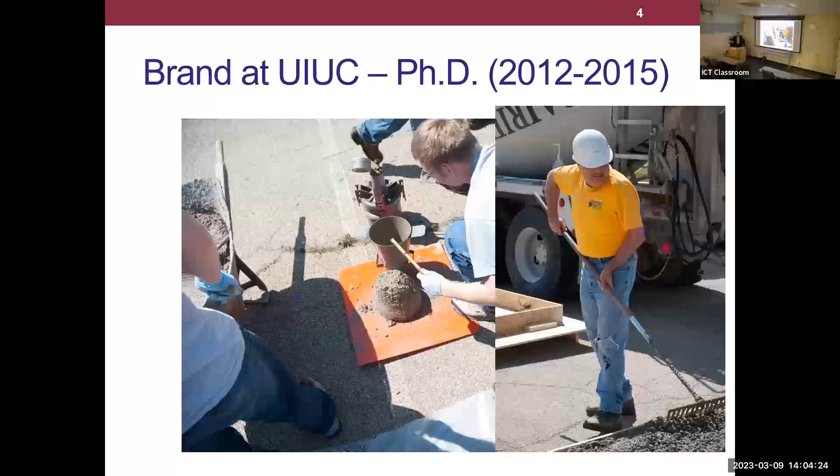We did a really big project at the beginning of my PhD doing slab testing. So we're doing slab testing in the building next door, right? I'm really strong. I was able to lift those 1,000-pound slabs of concrete, right, to test them. But anyways, it was a huge project. Dr. Roesler even helped us cast the slabs, right? We had a big project. I think we had 16 slabs or something to cast in one day, 4 concrete trucks. It was a lot of fun.

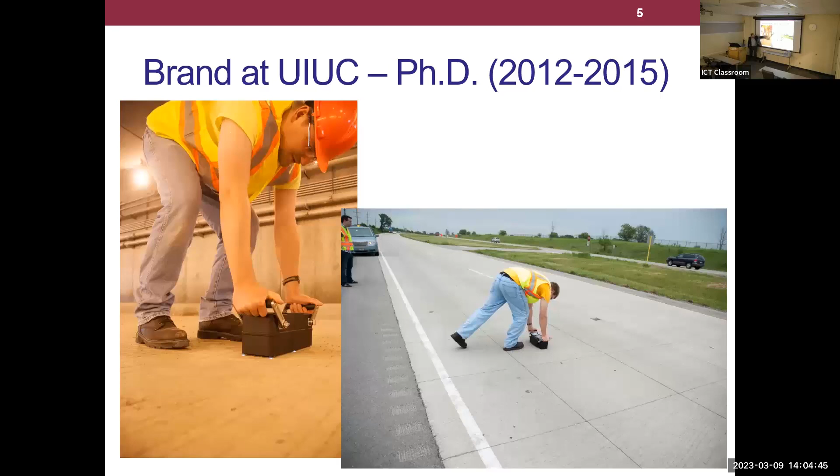It was also fun going out in the fields, right? Running out in the middle of traffic with some NDT equipment. You can kind of see some trucks in the background there barreling down the road towards me. Fun times, right? And probably some of the best memories, right? We're just with a great lab group. So I'm sure there's still some people here that only recently graduated, right? This photo's from 2015, and just to tell you how long it took some people to graduate there. Right? And then of course, probably my favorite memory is I was Santa Claus at the Christmas parties, right? So who's Santa Claus now? Do we still have a Santa Claus? Yeah.

Oh, okay. So at least someone took up the mantle of Santa Claus. So anyways, it's still really great. Illinois has such a large network. Dr. Race's group, you know, we see each other a lot at conferences. He was at a conference in Texas where he was sitting on the Longhorn here, right? So my group now at VT is not that large, but I can aspire that one day I'll be at a conference sitting on a Longhorn, and my group will be around me. That's what I hope to aspire to.

But anyways, let's get into the talk. So again, talking about the interaction between cement and asphalt. Part of this is going to be an extension from my PhD work. So I'm going to introduce some of the stuff I did during my PhD, and then all the new stuff I'm doing at VT on a related topic. So kind of an alternate title here is, why can't we be friends? We do have bonding issues between overlays and things.

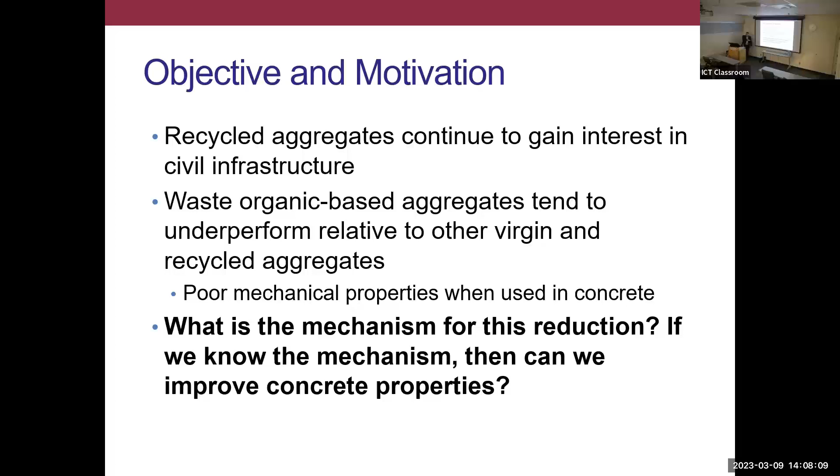So anyways, we know there's some sort of bonding issue between RAP and cement paste. That's what I found in my PhD, and that's what I'll be showing a little bit here. The question is why? Because if we can answer why and establish a mechanism as to why that happens, then we can devise a method to interrupt that mechanism, and then potentially improve bonding or somehow improve performance otherwise. Okay.

So this is work from years ago that I did. This is increasing RAP content. We did fractionated RAP, so we also called it FRAP, so you'll see FRAP and RAP on here as well. Basically, just replacing up to 50% of the coarse aggregate in a concrete with RAP. You can see the significant reductions. We're dropping almost 50% on tensile strength. It's a fairly significant drop.

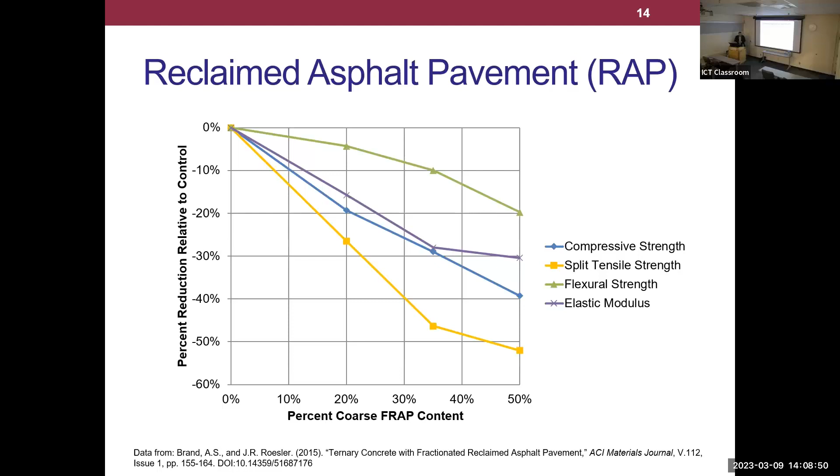So then traditionally we would have to over-design our pavement to accommodate for that. But that was a different study, that's a different story. You actually don't have to, but I'm not going to talk about that today.

So first off, the first thought people had was, okay, your modulus is decreasing when you use RAP. Well, of course it is. Asphalt binder itself has a much lower modulus than concrete. No surprise there. But we actually proved that wasn't the issue. We went and froze the concrete, to the point at which asphalt becomes stiff enough to be close to concrete. And we basically found that the modulus didn't change.

Okay. Also, when you're using 50% RAP as a replacement of your coarse aggregate in the concrete, only 0.4% of the total volume of the concrete is asphalt. So is 0.4% asphalt really going to be the only reason why you're dropping modulus by 40%? That doesn't seem logical, right?

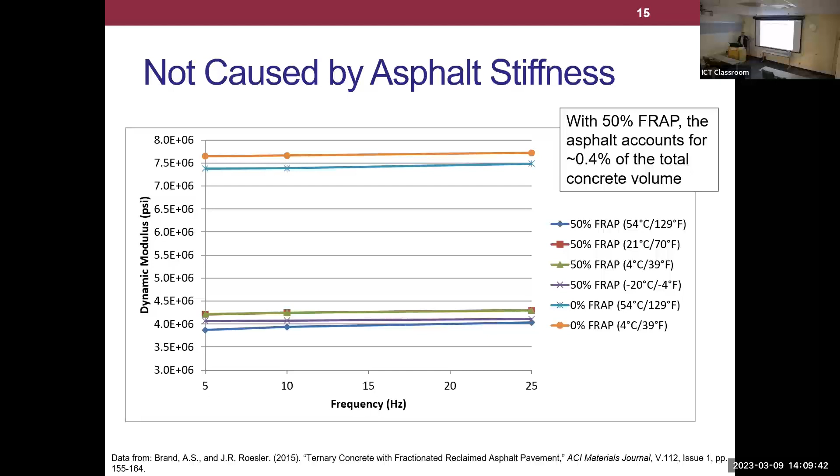So what we did then is we looked at something known as the interfacial transition zone. So this is the ITZ that forms in concrete due to something called the wall effect. In a concrete, the aggregate basically looks like a wall relative to your cement grains. Cement itself also has a gradation, a very, very fine gradation, with a mean particle size of about 15 microns.

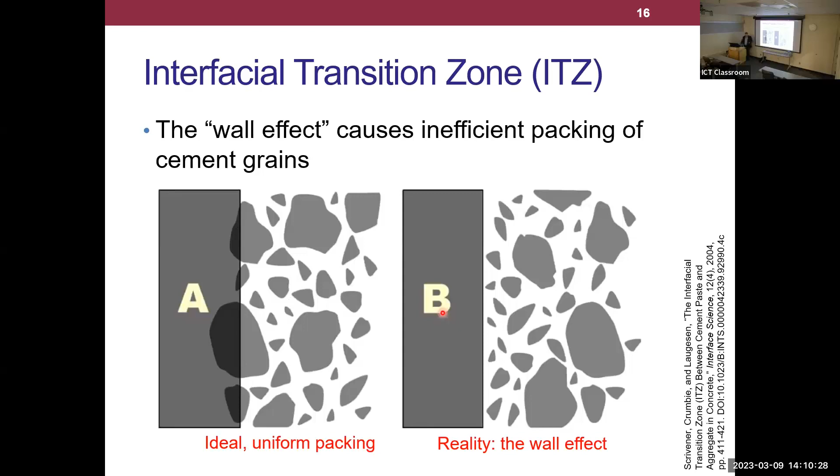So a 15 micron cement particle relative to a 25 millimeter coarse aggregate, that coarse aggregate is a gigantic wall. So it basically means there's going to be inefficient packing immediately against that aggregate wall. Because of this inefficient packing, we form this thing known as the ITZ. So how do we study this ITZ? And we're going to talk about what the properties of the ITZ are in just a minute.

Okay. Well, why didn't that?

There it goes. So in order to study the ITZ, we have to look at a fairly small scale. The ITZ itself is only going to be about 20 microns to maybe 100 microns surrounding the aggregate. So that's pretty small, so we use an electron microscope. An electron microscope is a similar idea to a typical optical microscope, except we're using electrons instead of light to image your surface. And instead of your eyes looking at the image, you have an electron detector that's reading the image.

Sample preparation is really difficult. You have to take your concrete, dry it out, backfill all the pores with epoxy to stabilize the microstructure, then polish it really flat, and then you can put it in the electron microscope. That process alone took me 6 months of my PhD. But once it worked, we were able to get a lot of data. So anyways, that's what we did.

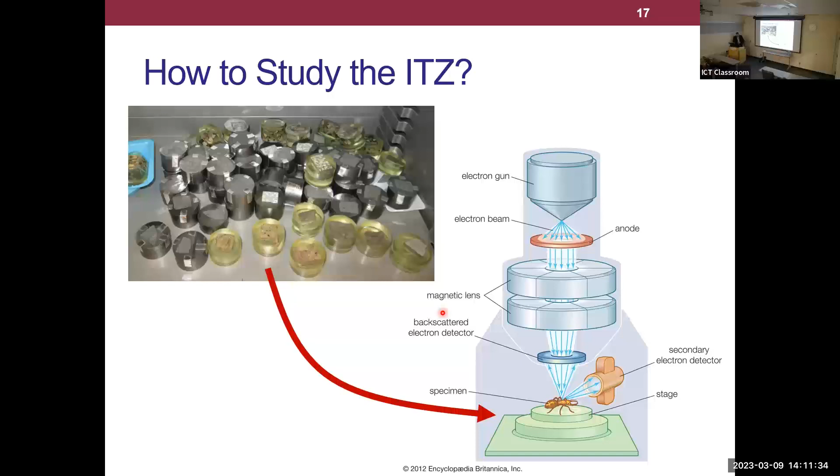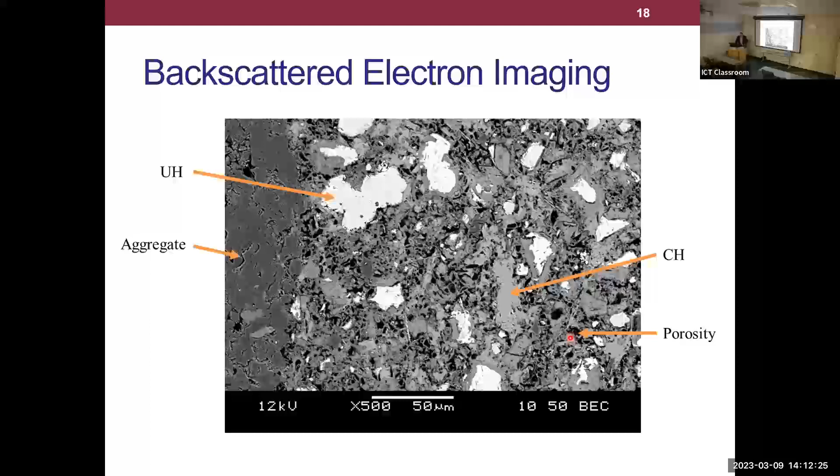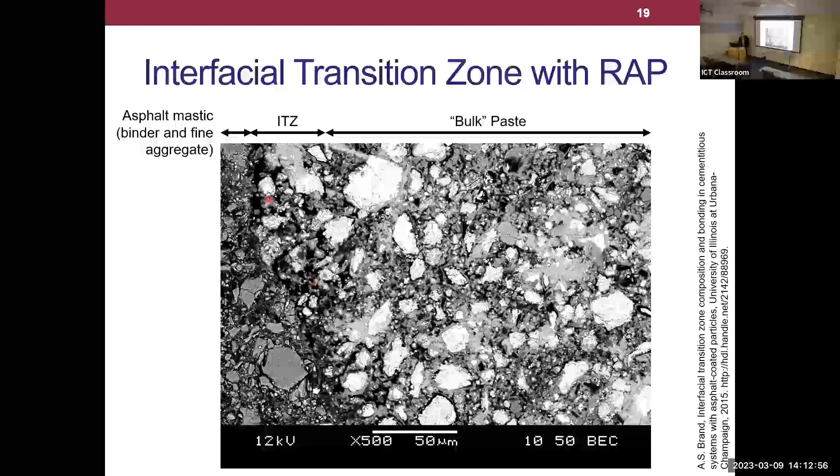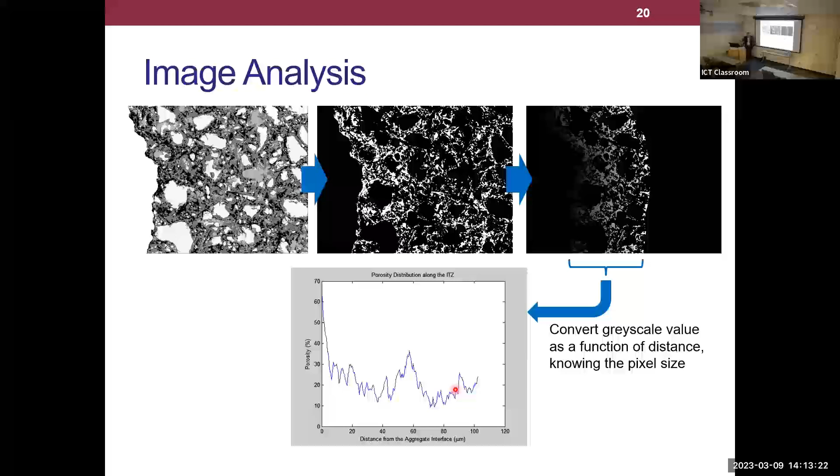So what we have to do here is just use image analysis. I won't go through all the image analysis, but you basically threshold out what's the unhydrated cement, what's the calcium hydroxide, what's the porosity, convert it to a binary image, do some more image processing, and you can then basically get a gradient of these properties as a function of distance from the aggregate surface. And when we do this over many images, we can come up with an average representation of what the ITZ looks like.

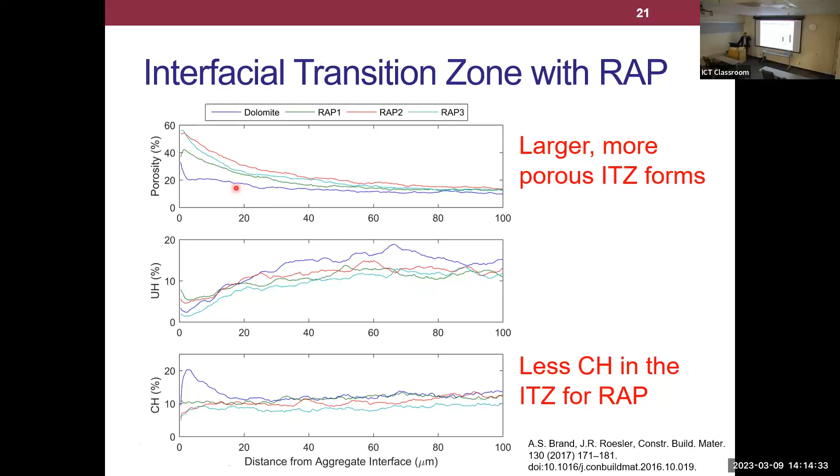And then there's some other uses. There was some interesting stuff with calcium hydroxide, unhydrated cement. Not a whole lot of changes. But really it's this porosity that's very different. Now typically, when we're designing Portland cement concrete, we add a whole bunch of stuff to it. One of the things we typically use to make high performance concrete is to add something known as silica fume. That's a supplementary cementitious material, and we tend to get a much higher strength concrete, much more durable

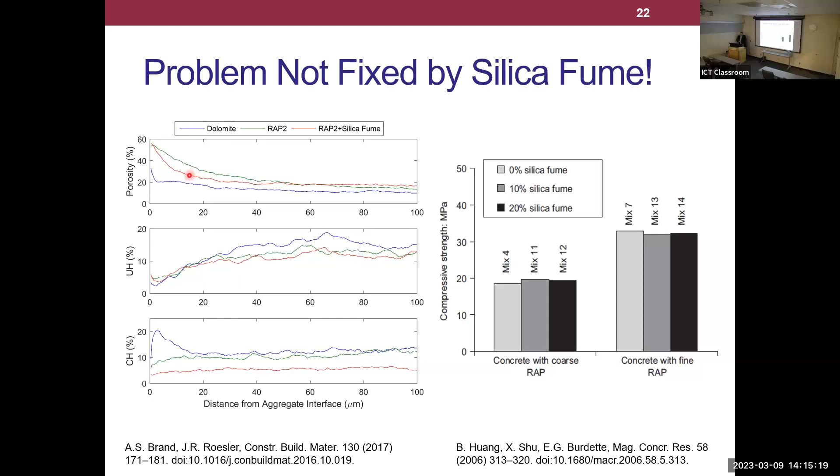concrete. But what we found and what other studies have found is that adding silica fume to concrete with RAP did not make an improvement. So you were basically wasting money by using silica fume here. Silica fume is about 10 times more expensive than cement, so you're literally throwing money away. We still see there's a little bit of an improvement in porosity here, but it's still a fairly large porous ITZ. So silica fume doesn't fix our problem.

So then we came to the question: why do we have a larger, more porous ITZ? Why is it forming? It doesn't seem logical that it would form. There has to be some sort of mechanism that's causing it to form. So everything up until now was stuff I did during my PhD. Everything from here on is some of our new stuff that we'll be publishing soon.

What we know from the existing literature is that there are compounds in the asphalt that can leach out of the asphalt. It does depend on what your solution is. Are we talking about rainwater? Are we talking about an acidic, some sort of industrial water? We do know that there are compounds that will leach. Probably everyone here already knows asphalt is a very complex chemistry. There's no one molecule of asphalt. There's a very large range of molecular weights and chemistries and functional groups and heteroatoms and all that sort of stuff. But anyways, we do know that there can be leachate from asphalt.

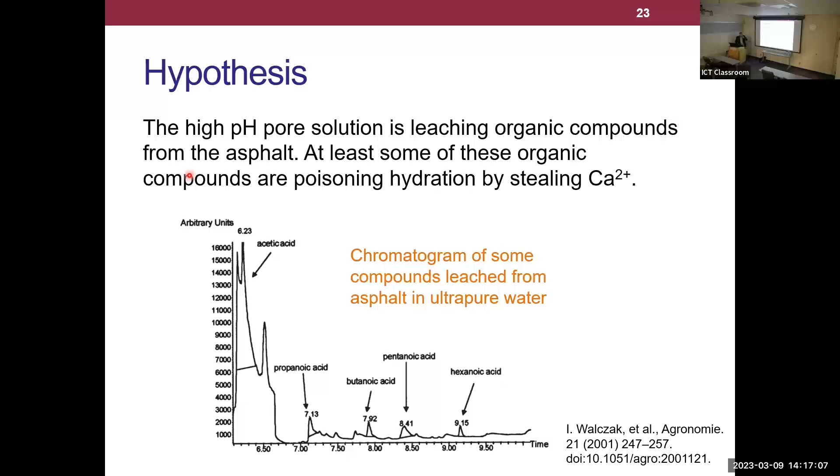So our hypothesis then was, when cement hydrates, it produces a very high pH pore solution. In a saturated concrete, those pores are not filled with air, they're filled with pore solution. That's a high pH pore solution. So our hypothesis was that high pH pore solution is leaching compounds from the RAP, from the asphalt on the RAP, and that is somehow poisoning hydration. It's somehow preventing hydration from happening. So then we set off to see if that hypothesis made sense.

The first thing we did was just a simple proof of concept. We took some RAP and we soaked some of it in an NaOH solution, sodium hydroxide. Again, pore solution is a high pH. It has sodium, it has potassium, it has hydroxyl ions and some other stuff. For simplicity, we just used NaOH as an analog, much easier to work with. So we did a pH 12 NaOH solution. We soaked the RAP in that, then we also soaked it in water.

Every few days, we would take a sample out and send it to a TOC analyzer, total organic carbon. In this technique, you basically inject your aqueous solution, it goes through some sort of flame ionizer, and it tells you how much organic carbon is there. So it doesn't detect, for instance, CO2 dissolved in the water. That's not organic carbon. The organic carbon would be things in organic molecules. Asphalt is made out of organic molecules.

So what we found is that in the sodium hydroxide solution, we are definitely leaching a lot more organic compounds than we are in water. So that's our first suggestion that maybe this hypothesis starts to make sense.

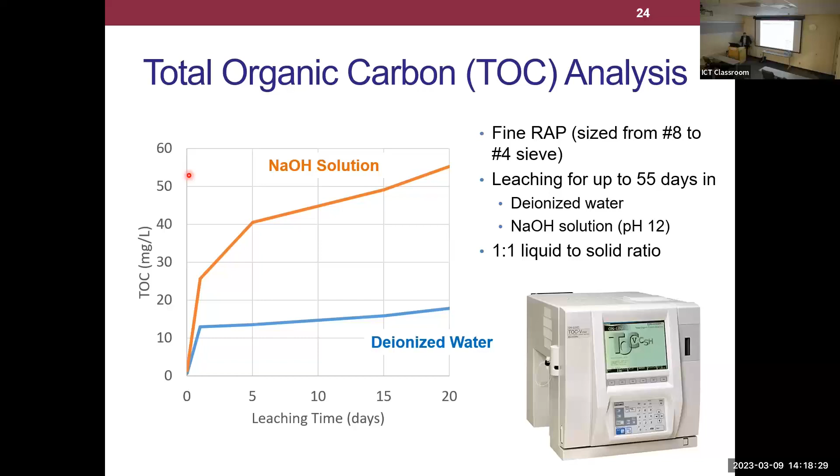So then we did something known as HPLC. Okay, so now we're getting into a lot more chemistry here. So this is high performance liquid chromatography. So here you take your sample and you drop it through a column that's going to be filled with something, right? There's various types of columns. And you basically measure how long it takes for the various compounds in your solution to travel through that column.

Okay, so depending on the polarity of the molecule, the size of the molecule, its adsorption characteristics and things, you're basically going to see different retention times. So how long it takes for that compound to travel through the column. You're going to see different retention times for different compounds.

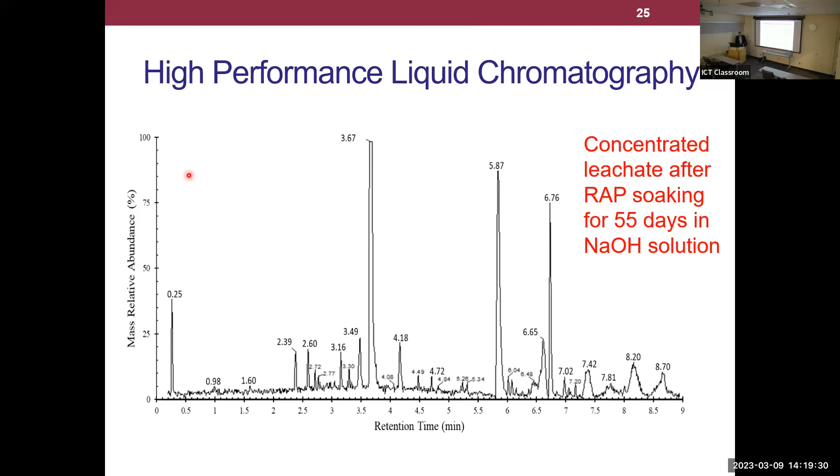So what we're seeing here is a lot of peaks, which tells us there's a lot of different compounds. And that's maybe no surprise, right? Asphalt, again, is made out of a whole lot of different compounds, right? There's no one molecule we can define. So this kind of confuses everything because that's a lot of stuff here, all right?

So then what we did is we basically took solution at specific retention times, right? So you have this liquid traveling through the column, okay? And then you grab that solution coming out of the column at specific times.

Maybe I should use this so the audience online can see, right?

You grab it at specific times, and then you can basically do chemical analysis on that. So it's a way for you to sort of segment out these different peaks, okay? So the first one is we took this main peak here, and we sent it through something known as a mass spectrometer. So in a mass spectrometer, you send your aqueous solution, it goes through a flame ionizer, or in this case, it was an electrospray ionizer or something. It basically ionizes your

molecules, right? And then the mass spectrometer sends it along a magnet, right? And however long it takes to travel along that magnet tells you what the mass to charge ratio is. That's kind of a weird way to think about things. Okay, so it's the molecular mass of that compound divided by the charge, right? So it could be a 0 charge, 1 charge, 2 charge, 3 charge, whatever it is. Okay, so it kind of relates to molecular weight of the compound, but it's not necessarily the molecular weight of the compound, because that flame ionizing technique can basically fragment your compounds if it's a big molecule.

Anyway, so it's probably more chemistry than people want to hear. So if this is where you want to put your hands over your ears, you can.

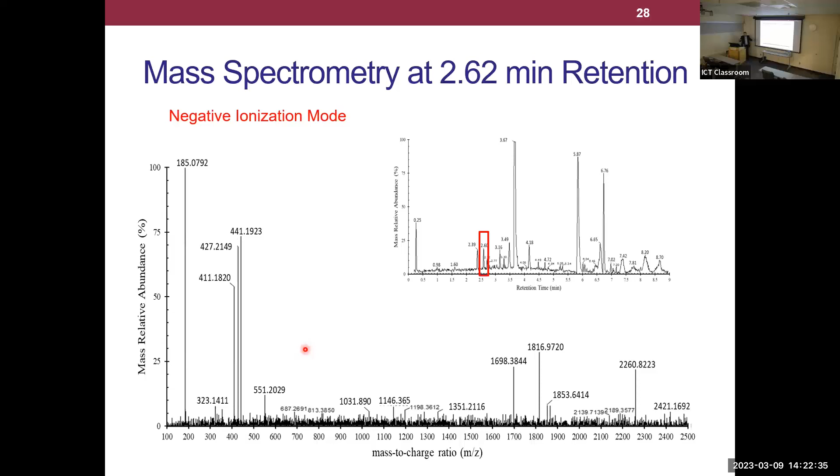So again, all this is really telling us, right, is that whatever organic compounds are in this leachate, it's a whole bunch of different compounds, right? There's no one compound that leached out. Again, maybe not a surprise. Asphalt itself is not one compound, right? There's a lot of stuff there.

So some other stuff we did then is we used Fourier transform infrared spectroscopy. Again, maybe a little more chemistry than you wanted to know. In FTIR, peaks correspond to specific functional groups. Okay, so basically when we compare, so this is kind of our blank scan, right, without any leachate, right?

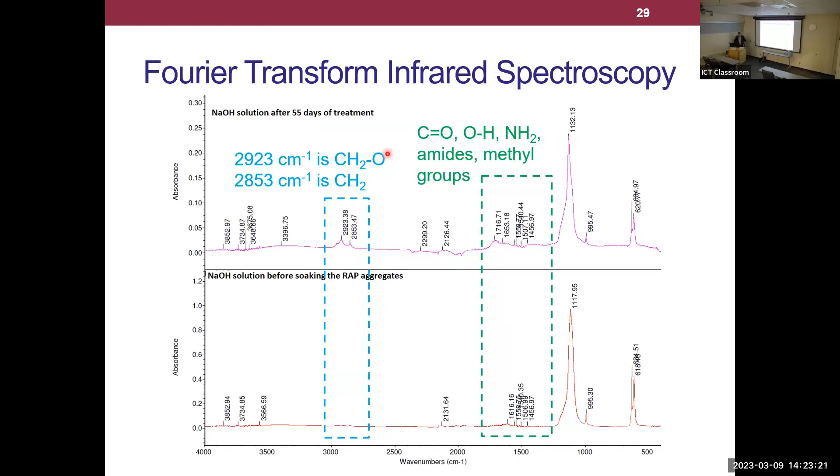And here's the leachate from RAP. And for the most part, you see things are pretty similar, but you see a lot more peaks here, right? And basically these all correspond to sort of organic compounds, right? So again, that's maybe not a surprise. But again, there's just no one compound in this leachate, right, that we can point to. And this is, again, what that sort of suggests.

Okay, so now we know that there is something in the leachate, right? We do have organic compounds in the leachate. Are they actually affecting cement hydration? That is our next question. Okay, so here we use something known as isothermal calorimetry. We use this a lot in cement and concrete science. So as cement hydrates, it gives off heat. In a calorimeter, we measure how much heat is given off over time, right? And that gives us kind of an idea about the kinetics, okay?

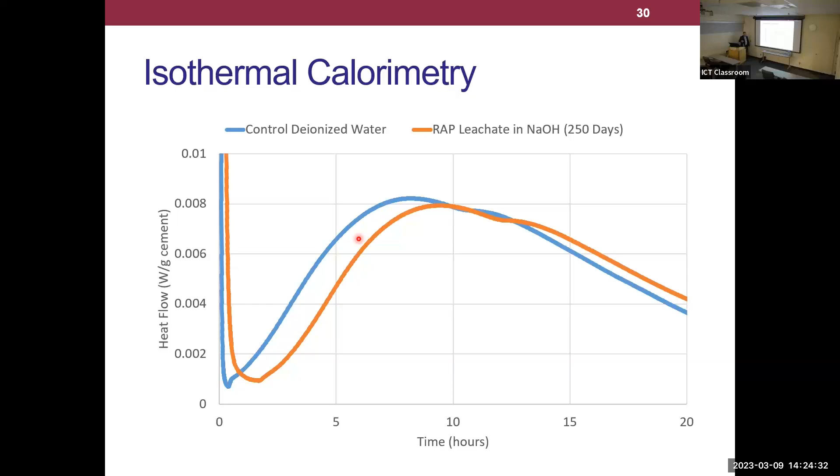So what we're seeing here is we're looking at a control sample where we just mixed cement powder with water, right? And then the orange line is we mixed cement powder with that NaOH solution that had that organic leachate, right? And what we're seeing here is a shift right. So this main peak, this is our main hydration peak of cement. We're seeing this peak shift to the right, which basically means that we did delay the rate at which cement hydrated. Okay, so there was some retardation, there was some change to how the cement was hydrated, right? We did delay it slightly. Okay, so now we kind of have an idea that, yeah, maybe this hypothesis does make sense.

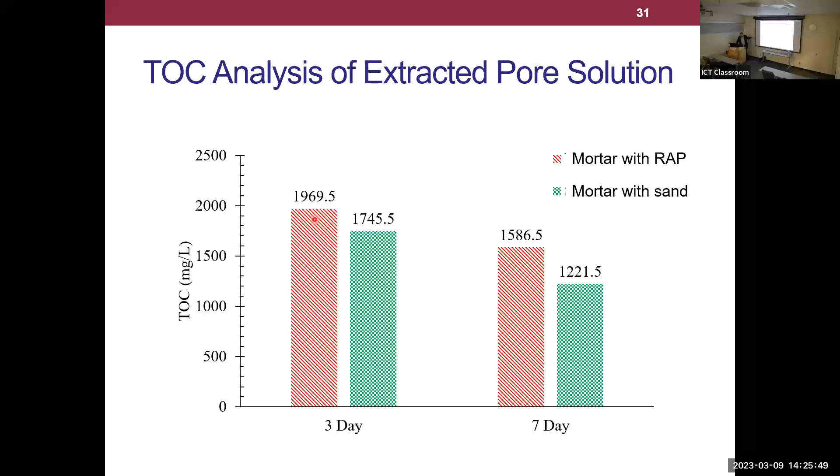So first we proved it just with soaking in an NaOH solution. Here, this is actually in pore solution. And yes, we definitely have organic compounds. So let's reevaluate here, right? So we're thinking that the high pH pore solution of the concrete is leaching those organic compounds, and those organic compounds are somehow affecting cement hydration. Okay, so we haven't quite proven this last part, right? We thought it's just stealing calcium from solution. We don't know if that's true yet. That's future work. But at least what we've shown so far is, yes, we definitely have organic compounds in the leachate, in the pore solution, right? And we definitely are seeing some effect to cement hydration.

Okay, so now we have an idea of what this mechanism is, why we might be getting this larger, more porous ITZ. So our next question is, hey, can we pre-soak the RAP, leach those compounds, and call it a day, right? Maybe we'll get better performance. So that's what we tried next. So we took all of our RAP, we soaked it in a high pH solution, again, sodium hydroxide, washed it, and then mixed it into our concrete or mortar. And it didn't work. So unfortunately, that hypothesis did not prove right, because what we actually saw is when we had RAP that was pre-soaked, we actually got a lot more organic compounds than the RAP that we never treated in the first place.

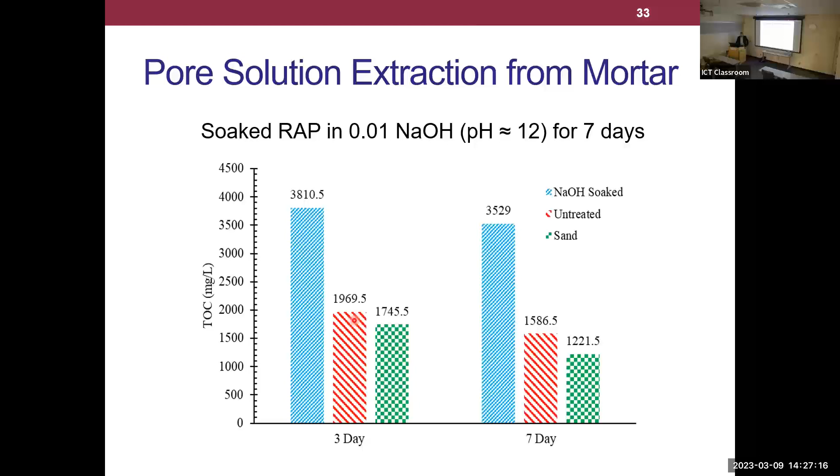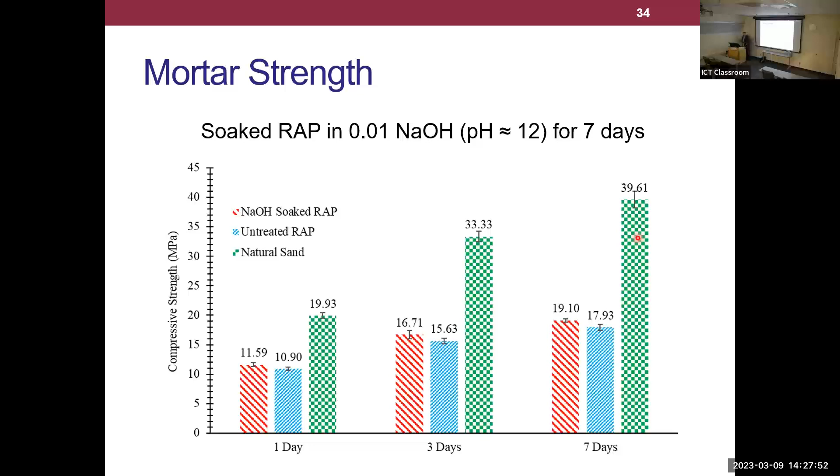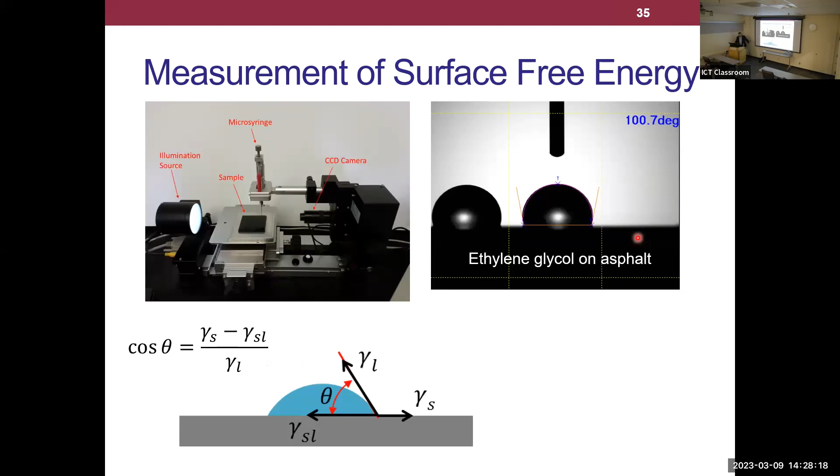Probably not. All right. So next thing we tried to figure out, why isn't this NaOH working? And why are we seeing even more leachate after we're trying to pre-leach those organic compounds? So the next thing we tried to do was some surface energy measurements. Probably some of you are familiar with this in this lab. When I was a PhD student, I used Dr. Al-Qadi's equipment and did some of these measurements myself. So we're also doing these measurements still.

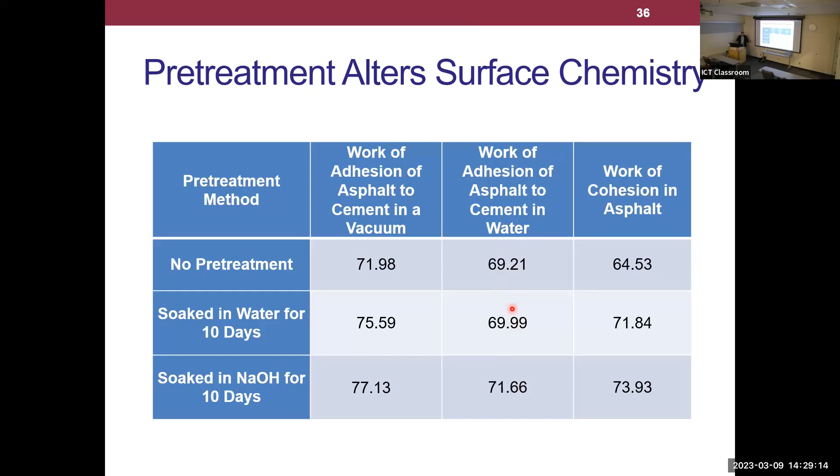And what you'll see here is when we actually compare this to the surface free energy of cement paste, we actually are seeing a slight increase in the work of adhesion. It's almost kind of like a chemical bonding mechanism, a slight increase. Is it really solving our problem? Probably not really. But then we're still trying to figure out why is this NaOH affecting things?

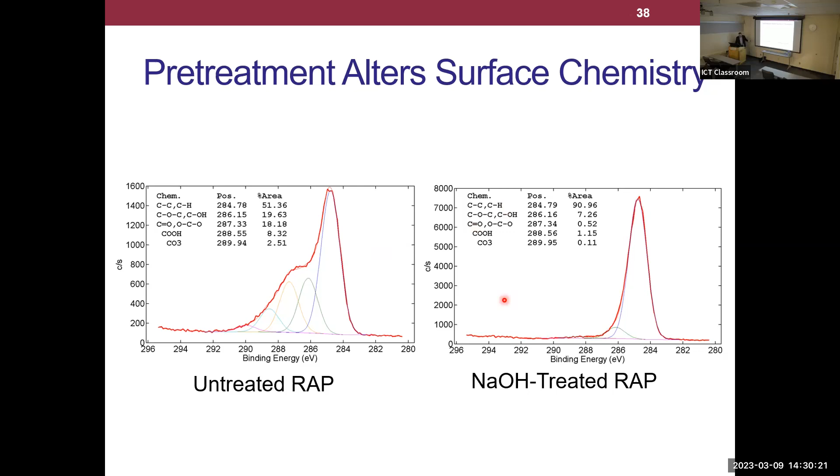So anyways, in the end, did I solve the problem? No, not by any means. But at least we started to prove some more things here. So what do we know after all of this? We definitely know that RAP aggregates do produce a larger, more porous ITZ. And that's one of the reasons for the reduced modulus and possibly reduced strength of our concrete when we use RAP aggregates.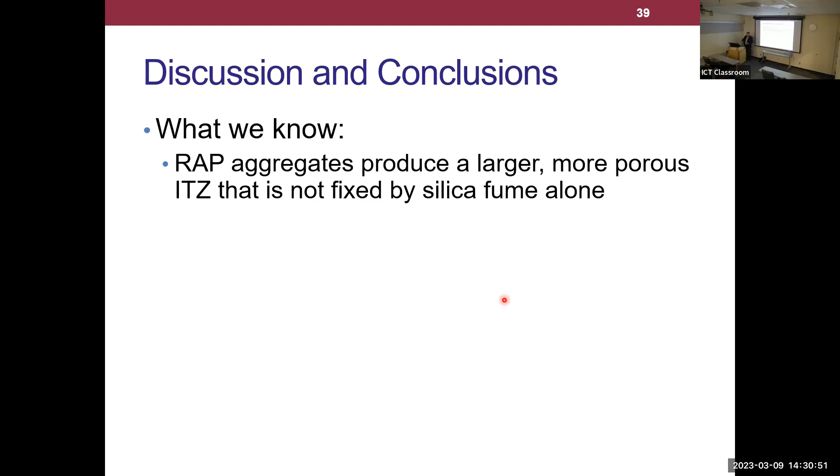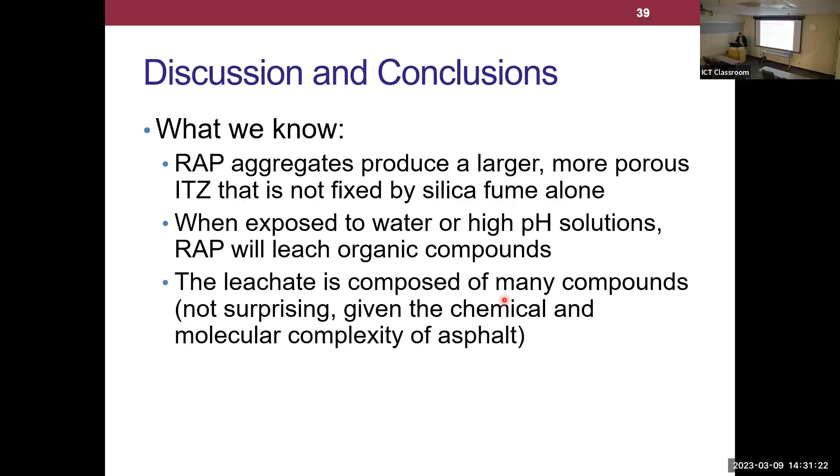We do know that high pH pore solution in the concrete is leaching organic compounds from the RAP. We definitely know that. What those organic compounds are, we don't know yet. There's a bunch of compounds; we saw that with a bunch of different techniques. We were not able to identify what specific compounds were present, because there's probably just a lot of them. That shouldn't be a surprise when we know asphalt itself is fairly complex.

And then we also showed that there appears to be a retardation of cement hydration. We're somehow delaying or negatively impacting cement hydration because of this leachate. We have not proved if it is some sort of mechanism that's stealing calcium like we initially thought. That's something we still have to prove.

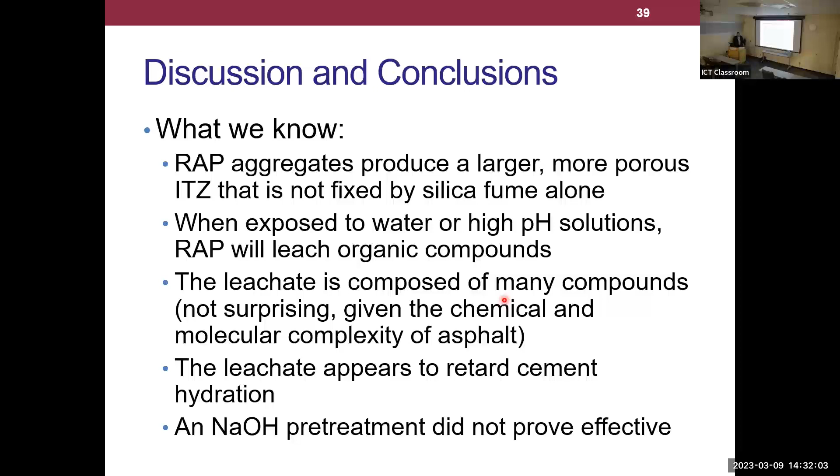And then we also showed that sodium hydroxide solution to try and pre-leach the organic compounds did not appear to be very effective. A very marginal increase in strength. And then we saw much larger organic compounds content in the leachate.

So what don't we know? We don't know what that leachate is. We know it's a whole bunch of compounds. We know there's a whole bunch of functional groups. All those functional groups are just organic compounds. Doesn't really help us.

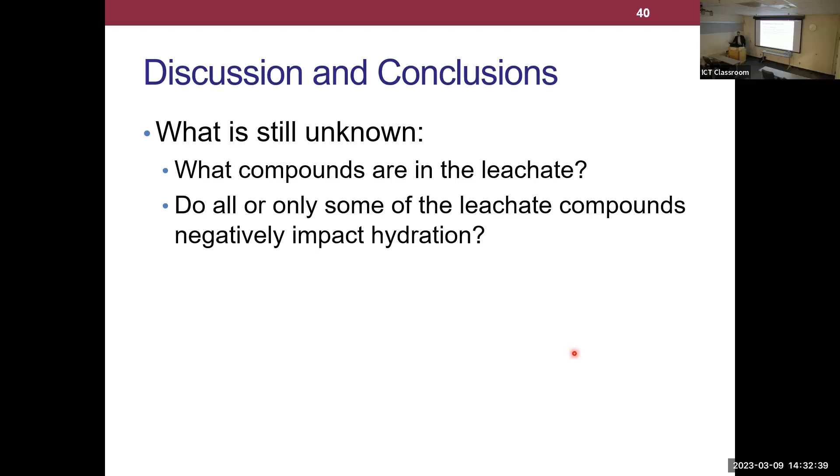The other thing we don't know is, are all of those compounds in the leachate affecting hydration, right? Maybe there's some compounds in that leachate that don't affect cement hydration whatsoever. Maybe there's some of them that accelerate cement hydration, are beneficial, right? In the end, we kind of saw that the net effect was negative, right? Net effect was a retardation of cement hydration.

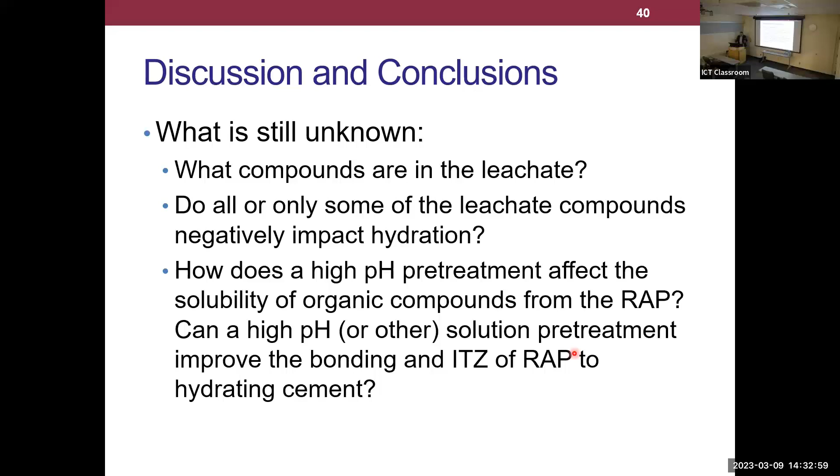And the other thing we never really figured out is, what is the sodium hydroxide solution really doing, right? It's doing some sort of surface modification, right? We're seeing more organic compounds in the leachate, but then we also saw a slight increase in strength, right? So again, those don't quite really align with what we were originally thinking here.

So, of course, I presented this with respect to RAP in concrete, okay? But that's not all that's relevant here, right? There's not many people looking at using RAP aggregates in concrete. I don't believe there's any state DOT currently even doing that, okay? Most find that the strength decreases, and they just say, well, it's not worth the effort, let's use some other aggregate, okay? So this is useful still, because we still see this effect with probably any organic, right?

So we also are seeing this effect with scrap tire rubber, for instance, right? I didn't show those data because I only have so much time, right? We may also see this if we use grass or something, right? But this may also prove applicable to other things, okay? So here we're looking at concrete overlays of asphalt, right? BCOA, bonded concrete over asphalt. Not as common as asphalt overlays of concrete, right? But it's applicable here, right?

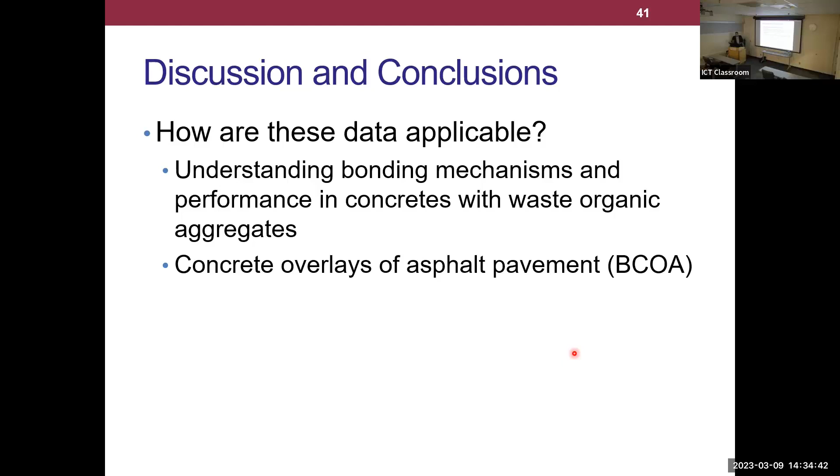So now if we're placing fresh concrete on top of an existing asphalt surface, right? How is that bond interface forming, right? So we're getting some mechanical interlock, right? As cement paste sort of seeps into the porosity and things at the surface, right? And maybe that's our best benefit, right? Because you're going to get an ITZ in that same scenario. We instead call it the OTZ, the overlay transition zone. Okay, again, it's only still tens of microns thick, but it's still there, right? So maybe we are getting this similar sort of behavior at that interface.

This is also applicable if we're trying to figure out why and how organic compounds in soils negatively impact cement stabilization. Right. So currently, if you're trying to stabilize an organic soil with cement, what do you do? You just add more cement. Is that economical? No. Right. So can we interrupt that mechanism, right, to use less cement in that sort of situation? So that's another project we're hoping to kind of build off of some of this work.

Maybe this also applies to when you're doing full depth reclamation and you're adding cement as a minor binder. Okay, is cement our best option there if we're seeing these negative impacts? I don't know, right? Maybe we're just adding too much cement. But again, if we interrupt this mechanism, maybe we can end up using less cement.